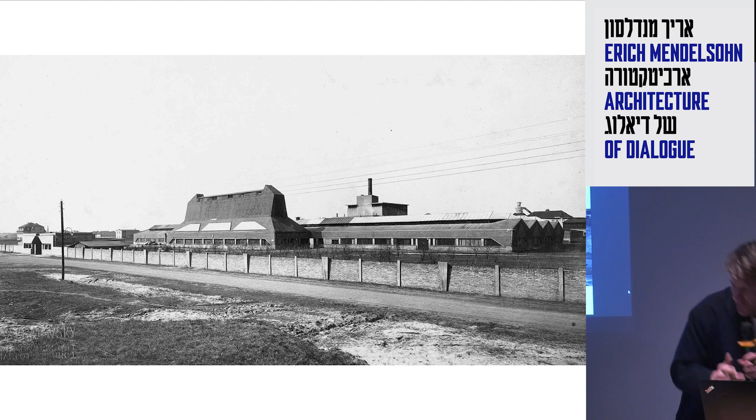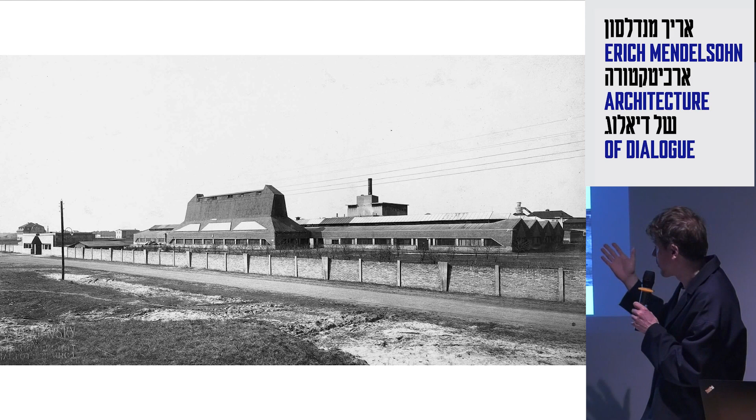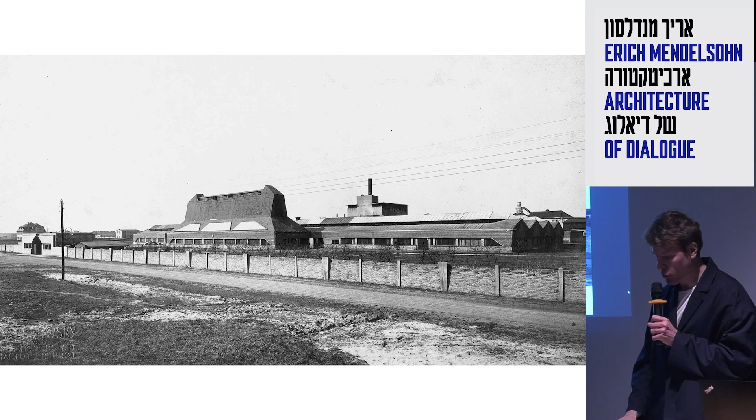Okay, so one of modern architecture's most dramatic roofs had a short lifespan. Daring in its outline, the roof of Erich Mendelsohn's famous dye works at Luckenwalde, a photo many of you will know, was erected in 1921 and torn down in 1935 after the hat factory was taken over by a machine building company largely controlled by the German Air Force and under the direction of Göring. This is a historic photo. Transforming what was once a hat factory into a war plant also resulted in the removal of its most prominent element, the trapezoidal roof, which would have been too easy a target for future air raids.

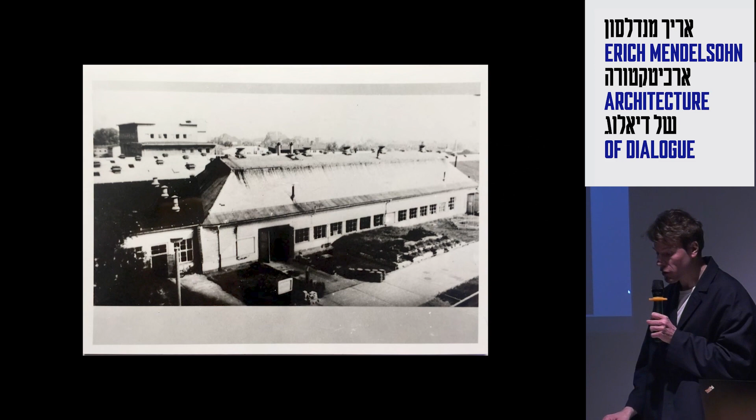Just 2 years later, in 1937, Mendelsohn heaped his projects into a mound, an ink drawing of which exists at the Kunstbibliothek in Berlin. In fact, his buildings in aggregate amounted to an entire mountain village of considerable size, crowned by the famous Einstein Tower. Whether this structure simply lent itself to becoming the crown, or whether Mendelsohn sought to give it a particular significance, still in 1925, it might have been Luckenwalde at the very top of a similar drawing. You can actually spot it center left.

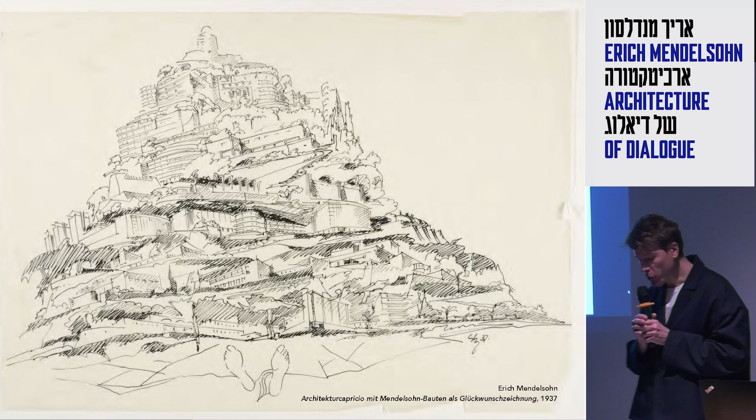That year, that is in 1925, Hans Poelzig and his students visited Mendelsohn's office in Berlin, and when he was asked about his best building to date by one of the students, Mendelsohn replied without hesitation, Luckenwalde. I assume most of you know the structure inside out, so I will offer just a bit of context. In a way, Luckenwalde is synonymous with the hat factory Steinberg, Herrmann and Co., which stands as a classical modernist masterpiece in a small town some 40 miles south of Berlin. I realize everything is in American because I work on a manuscript, so it's not in the metric system, but that is not so important.

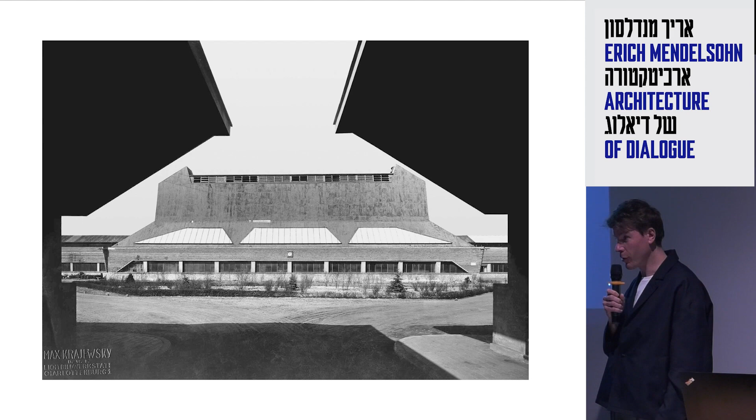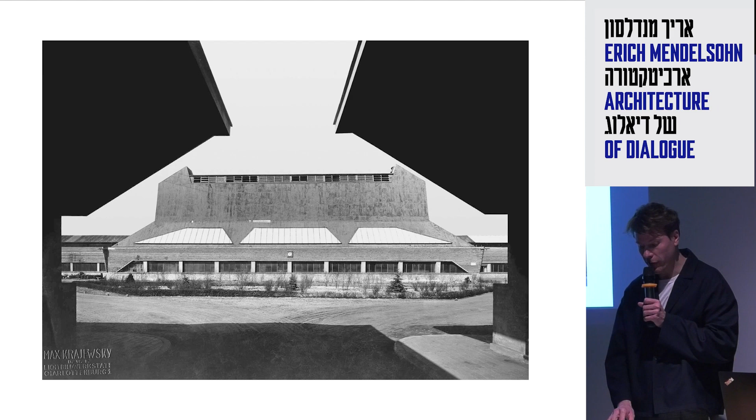Luckenwalde had long become the cradle of German hat fashion. The town witnessed an increase in textile and metal factories from the mid-19th century onwards, and in 1871 the first company adapted its production from textiles to hats. For long, the German hat producer Friedrich Steinberg vied with Gustav Herrmann, one of Mendelsohn's early patrons, for the best hat designs, but after merging their companies, they commissioned Mendelsohn to devise a new manufacturing plant on an empty lot on the outskirts of town. It became one of the paradigmatic expressions for an industry of the future, with critics like Adolf Behne pointing out the functional layout and its compelling translation into a tight spatial form.

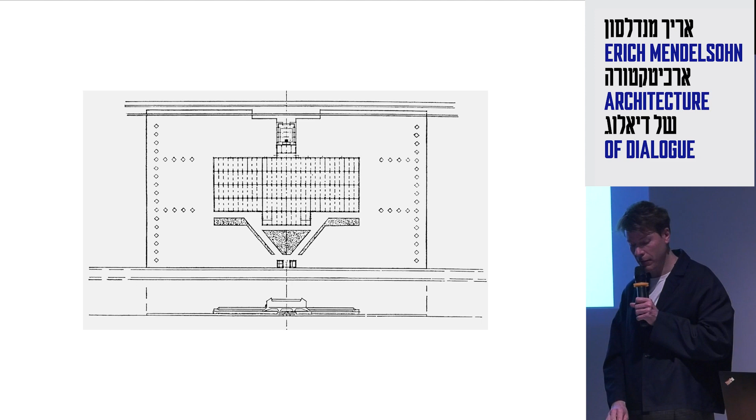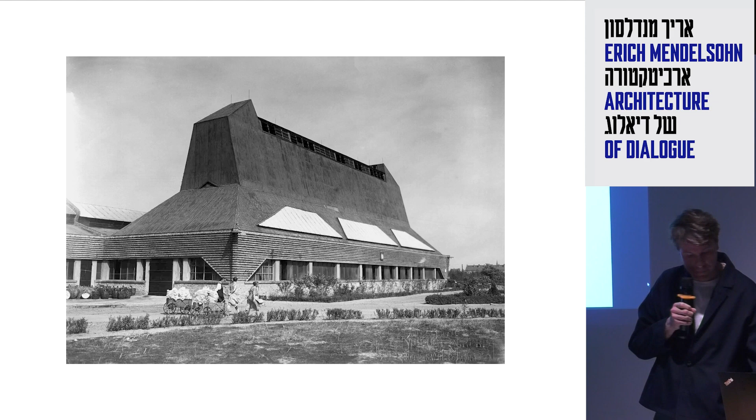At the center, which you see here on the site plan, 4 manufacturing sheds are framed by the dye works in the south and a power station, which we just saw also in Achim's presentation. And at the bottom, right next to the street, you can also see the small gatehouse. The factory's dye house, with its shaft-like hood, recreated the outline of a hat, while at the same time funneling through the roof the toxic fumes accruing inside. It was this feature in particular that ultimately led to a follow-up in Leningrad, the so-called Krasnoye Znamya, or Red Banner Factory. There is actually in Carsten's recent Birkhäuser publication also a cross-section, which I hadn't seen before.

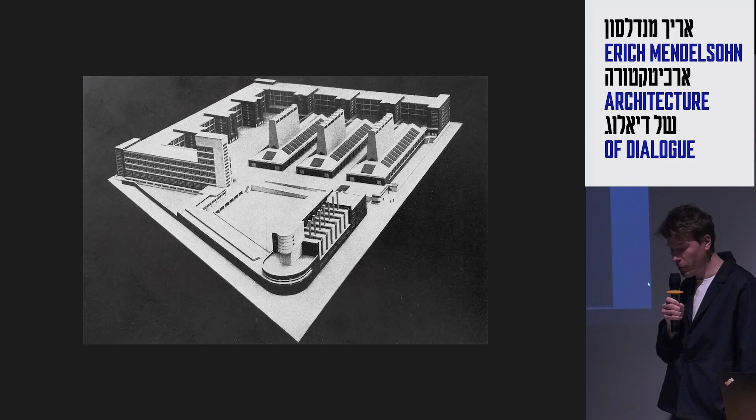In the summer of 1925, following Mendelsohn's visit to the Engadin, where he spent some time with Louise, he received a phone call from the Russian trade mission declaring their interest in the hat factory. 2 days later, on a warm Sunday in August, Mendelsohn made a day trip to Luckenwalde to prepare for a first meeting. He went swimming in the morning and lost his glasses, which could only be retrieved from the lake's grounds through prolonged dives by his friends. Finally commissioned in October that same year, in 1925, Erich traveled to Moscow and Leningrad together with Louise, where both went to visit all the monuments. This is all well documented in the correspondence. Louise found the stay in Leningrad particularly, and I quote, exhilarating, and for lunch she often relished caviar and vodka.

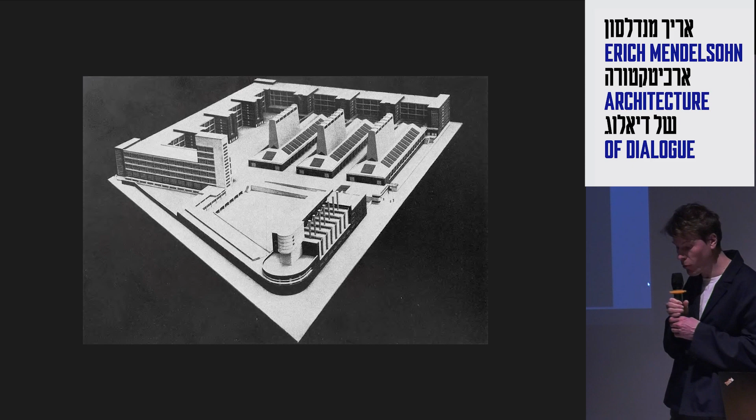Her memoirs recall the circumstances that led to the contract in Leningrad, a passage worth quoting at length. So this is Louise now speaking. Among the most fascinating people who came to his office were a group of Russians. Their purpose was to receive information about the dye works, which were part of the Luckenwalde hat factory built in 1921. When Erich received the commission to build the hat factory, he carefully studied the manufacturing process and became appalled by the working conditions of the laborers.

The steam of the dye vats permeated the whole shed, in spite of large exhaust fans, which only caused a strong draft and afflicted a large number of workmen with pneumonia. Erich found an excellent solution to this problem, which became widely published in industrial magazines and must have come to the attention of the Russians, who planned to build a large textile factory.

The principle on which Erich solved the problem of achieving a dry white shed was a very simple one. He constructed a chimney-like hood over the dye vats and upper arches into which the steam was exhausted. This created a chimney over the whole length of the building and effected constant and uniform air exchange. Erich led the Russians through the entire factory, and they were sufficiently impressed to offer him the commission to build a textile factory with 3 dye vats close to Leningrad.

Planning a large complex of building for Russia, a rather enigmatic country and unknown to most Europeans, excited not only Erich but the whole office. A day was set for bringing the plans to Leningrad, and the work in the office extended into the midnight hour. Bach records were played, inexhaustible quantities of coffee were provided, the atmosphere was pregnant with creation. We left for Leningrad in the fall of 1925, 1 year after Lenin's death. The textile factory was going to be built outside of Leningrad and combined a power station, 3 dye works, an administration building, and the actual factory.

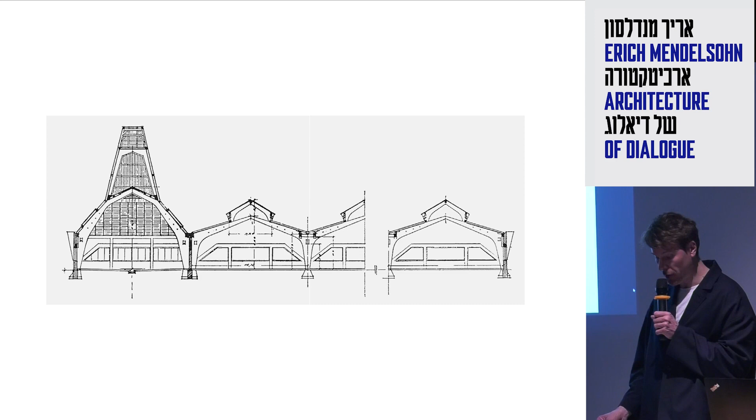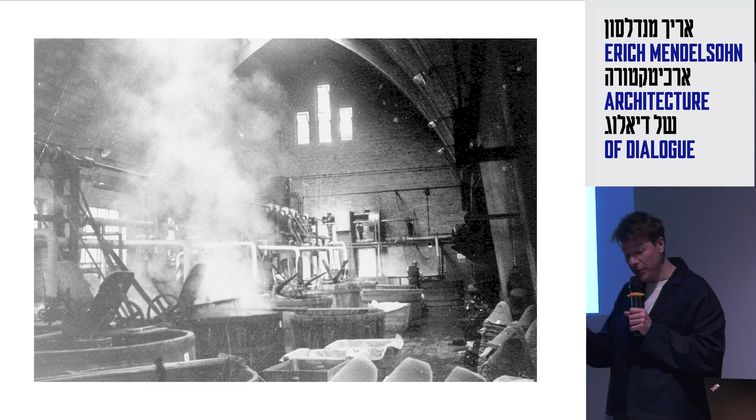So what was actually going on inside? The production of hats required workers to dye felt or wool, a process releasing poisonous fumes which in turn caused high humidity levels inside. And here I'm actually not sure, that is one of the photos I found in a compilation by Thomas Drachenberg. It doesn't look like the interior of Luckenwalde, so something is off. Okay, but you get the idea. The principle, I think, is still well illustrated. As a result, the warm, moist air affected the workers' lungs as well as the materials, and it also impeded interior visibility, which further complicated the work process.

Previously, architects employed smokestacks, fans, or pressurized air to attenuate the emergence of fog. But these measures created only new conditions, such as draft and an excessive temperature rise. Stacks alone were too exposed to the fluctuation of outside temperatures and simply furthered the condensation of steam. By contrast, fans were either too weak or produced too much turbulence inside. Mechanical ventilation was of little help. Apparently, Mendelsohn was the first architect to come up with a solution, relieving the nuisance of poisonous fumes without creating side effects, often more harmful than the waste steam one sought to get rid of in the first place.

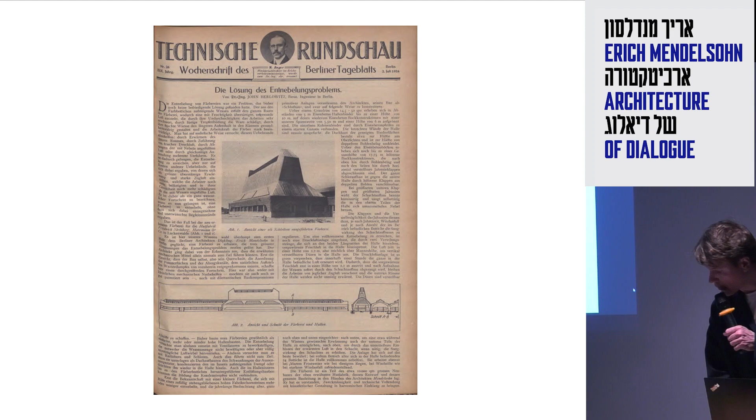How was this accomplished? One could facilitate the necessary air exchange by dint of negative air pressure, something Mendelsohn discovered by mere happenstance. According to John Berlowitz, a contemporary and Berlin-based engineer, Mendelsohn ran into a still operating dye factory whose, and here I quote, accidentally kept smokestack had the ability to defog the interior. Ultimately, a serendipitous discovery paired with architectural knowledge and years of research into primitive facilities enabled Mendelsohn to devise this structure. Berlowitz, the engineer, called it Schlotbau in German, in essence a chimney structure.

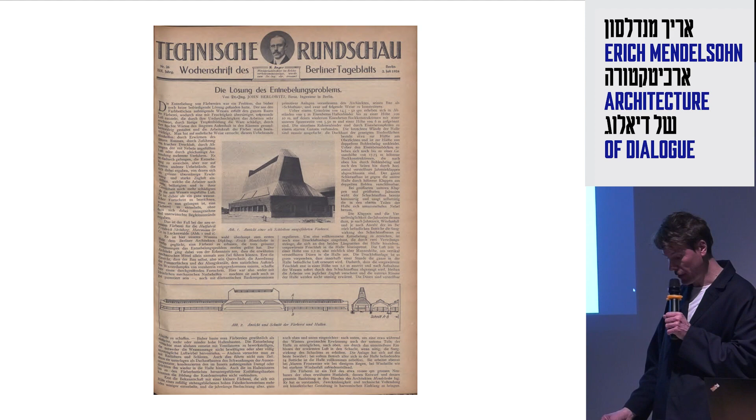Where previous designs brought about rising temperatures and draft, side effects which further exacerbated the condition of lungs already distressed by the toxic fumes, at Luckenwalde the interior was completely free of fog, even when the facility ran at full capacity with 24 dye tubs. For Berlowitz, it was the design itself, a response through architectural form, rather than building technologies, that really fixed the issue.

That's a translation I did, quoting from the newspaper. As far as we know, it was the Berlin-based architect who managed for the very first time to build a dye works that, despite its large dimensions, has completely resolved the problem of defogging. Only the insight that the building itself, that is its cross-section, the arrangement of windows and ventilation ducts, would have to enhance the natural buoyancy of the steam from the outset, was a major step forward.

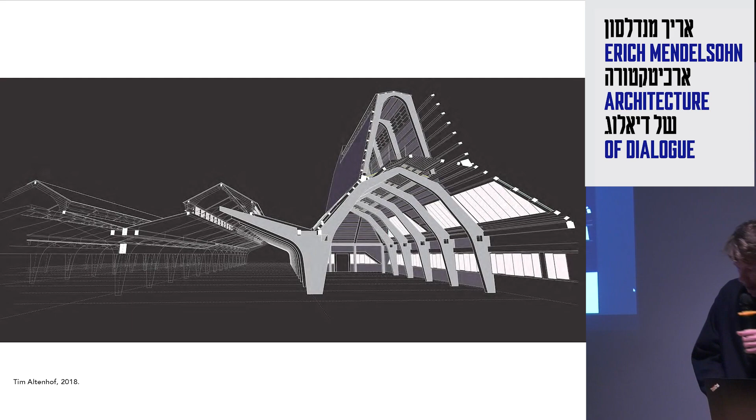At a height of 7 feet, just above the workers' heads, outlets for preheated compressed air enhanced the buoyancy force active inside the dye works so that air could be completely changed in just 1 hour. The account of Berlowitz is in line with that of Louise. Primitive or simple, the solution came in the form of a chimney. Most scholarship on Luckenwalde refers to the dye house as a kind of invention.

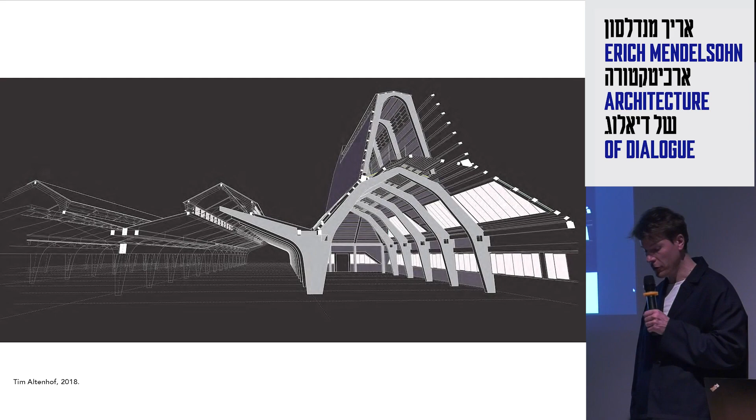In 1956, Arnold Whittick, and I have a slew of quotations now, describes it as an entirely new type which Mendelsohn invented. Sigrid Achenbach in 1987 notes a novel ventilation system. In 1997, Kathleen James Chakraborty sees in the dye works a significant technical innovation, and only 1 year later, Regina Stephan writes about an entirely new functional principle. Yet another year later, Bruno Zevi alludes to a special ventilation system that Mendelsohn invented.

While Kathleen James points to a few references for Luckenwalde, Josef Olbrich's gatehouse to a Darmstadt exhibition, a factory by Hans Poelzig, Bruno Zevi remarks that Mendelsohn's copious precedents were so diverse that they finally ended in smoke. It's just too many that it's pointless to actually point them out.

Published in 1992, a Bauwelt article suggests that Mendelsohn's design for the dye works was obviously influenced by Albert Kahn's industrial exhaust stacks, and that Kahn, the great industrial architect from the United States, was a frequent guest at the Rupenhorn estate. I'm not exactly sure what to make of this conjunction, not least because the Rupenhorn house was only built years later. Kahn is mentioned for the first time in 1942 in the correspondence between Erich and Louise.

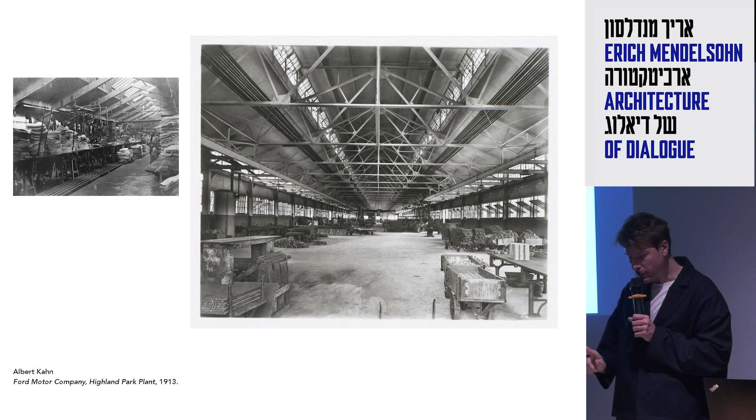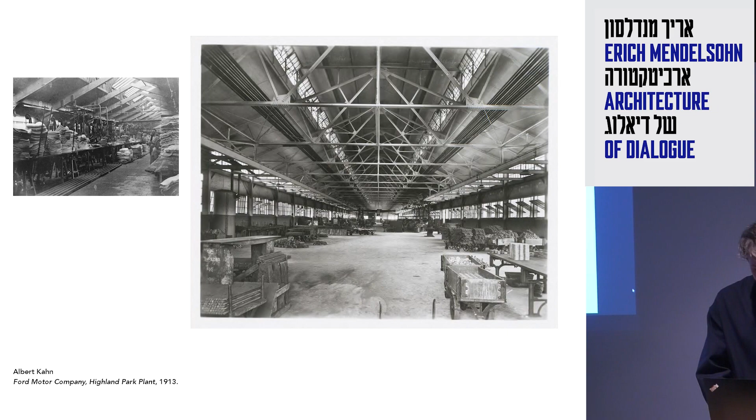I found this one photo, which could have perhaps been a precedent for the vents in the sheds, not in the dye works. But nor am I sure what to make of the invention posited by previous scholarship. Today I want to draw our attention to a cutaway section reminiscent of the dye works. Whether Mendelsohn knew this drawing is unknown to me.

It is included in Philibert de L'Orme's 1567 architectural treatise, Le Premier Tome de l'Architecture. As a French architect and writer, de L'Orme instructed the master builders of the French Renaissance both in the general layout of schemes as much as in the different ways of assembling them. In this manual, a woodcut shows an abstract kitchen, the walls of which are 10 to 12 feet high and perforated by apertures. Far above door height, the walls bend inwards, yielding a cross-section not unlike that of Luckenwalde.

Here, the two converging lines lead to something de L'Orme calls a lantern or chimney pipe. This lantern is 4 times narrower than the kitchen and open towards the surroundings by virtue of 3 narrow vents in each wall, quickly dissipating the smoke that develops below. A small circumferential wall running around these vents offers protection against the wind, while at the same time facilitating an upflow of smoke. A small cupola at the very top follows the same principle. Here, a double-layered shell is perforated in order to release the smoke. Was this the blueprint for Luckenwalde?

Rendered in brick, its outline and general proportion make it something of an unconscious archetype for what I call the house as chimney. A related discourse arose alongside chimneys, fireplaces and furnaces throughout the long 19th century, when all kinds of social and health reformers, educators and engineers, as well as experimental hygienists and physiologists promoted ideas on ventilation. In today's paper, I cannot rehearse this discourse, but briefly want to dwell on the house as chimney.

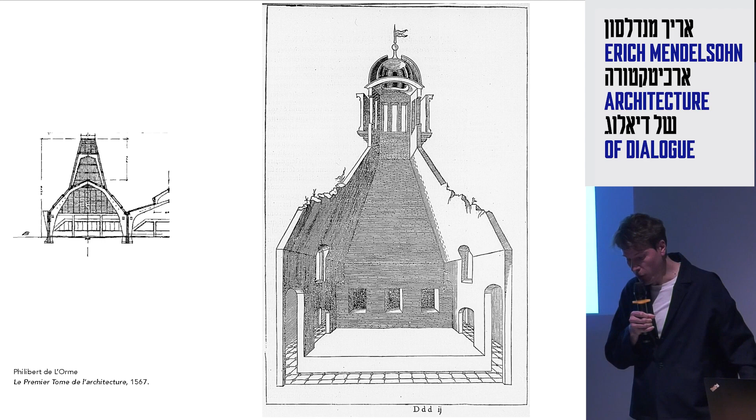Interior spaces of the 19th century were seen to be imbued with vitiated air, often acting as air traps. In his 1844 study on the English working class, Friedrich Engels condemned the overcrowded dwellings of the poor. So this is one of the first instances where someone makes an observation on the poor air quality inside. As though the vitiated atmosphere of the streets were not enough, they are penned, the workers, in dozens into single rooms, so that the air which they breathe at night is enough in itself to stifle them. Their houses are so built that the clammy air cannot escape.

Not only the polluted atmosphere posed a threat to urban dwellers. The dominant debates on the theory of ventilation were rather anthropocentric. Breathing human beings acted as the major polluter, vitiating the air inside through respiration and perspiration. This is why the American expert on ventilation, Lewis Leeds, wrote in 1896, and here I quote, that man's own breath is his greatest enemy. Here, ventilation was not imperative because humans inhale air, but rather because they exhale it. A remedy for these toxic interiors was what I call the leaky house. It promised relief by facilitating constant atmospheric exchange.

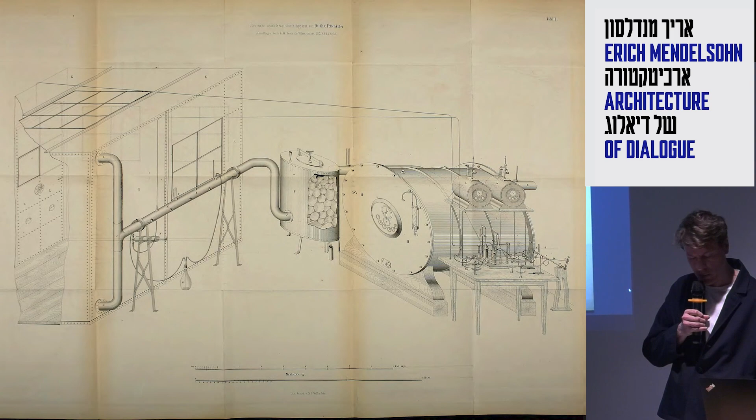The leaky house is simply the opposite of the closed worlds we know of today, buildings that seal us off from the environment, primarily on account of energy efficiency. In 1863, the German chemist Max von Pettenkofer introduced a wacky contraption to the readership of a Bavarian journal, which he called Respirationsapparat, respiration apparatus, a scientific device to establish a standard for air change rates necessary to keep a human being or animal in good health or alive.

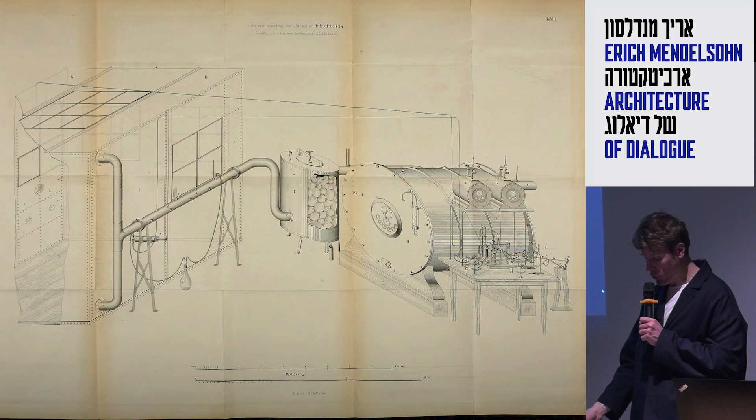Made of sheet iron and glass, it measured 8 feet on both sides and was sealed with wax. Almost airtight, the cell featured crevices and apertures, 3 circular holes which you can see at the door. And it was because of them that Pettenkofer found this respiration space to be able to communicate freely with the atmosphere. Frei mit der Atmosphäre kommunizieren. Soon, he ascribed this property to the house in general.

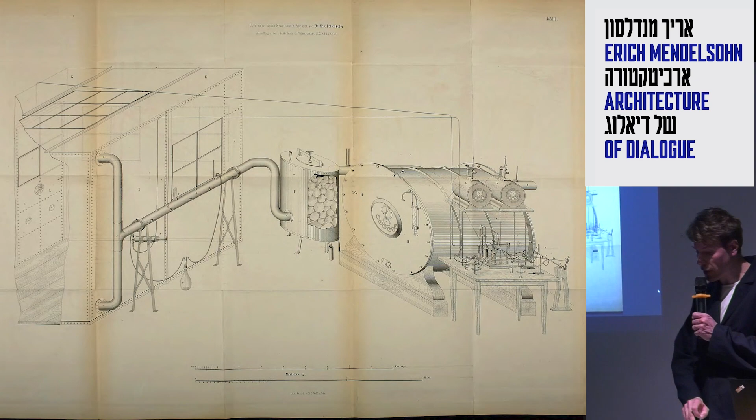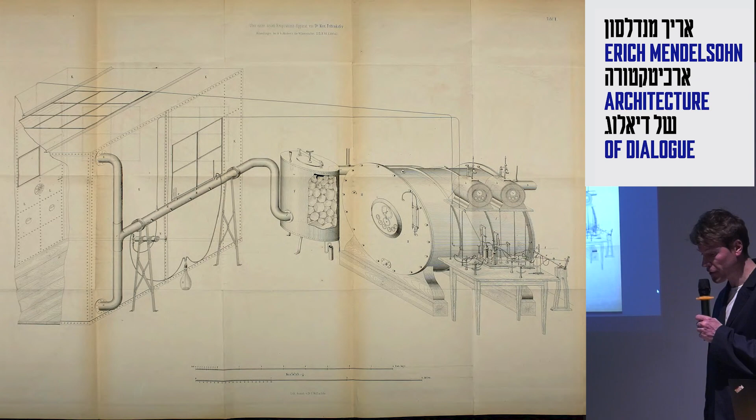In a series of lectures published in 1872, Pettenkofer claimed that no more than our clothing ought the house to be a contrivance for excluding us from the outside air. Human bodies need a steady flow of surrounding air, and tightly enclosed homes prevent a connection with the atmosphere. As mechanical ventilation was still uncommon for dwellings, the stack effect was a common theme. And because of temperature differences occurring between inside and outside, Pettenkofer claimed that leaky houses, in very broad terms, just act like large chimneys, because wind is always occurring, there are always temperature differences, has to do with physics.

If natural ventilation was good, resulting drafts were bad. The flow of air should remain imperceptible, because Pettenkofer and contemporaries in allied fields considered drafts unhealthy. Draft disturbs the body temperature merely on one side and poses a danger to health. Pettenkofer was not alone with these observations, and the Hungarian physician Josef Fodor, for instance, soon promoted similar ideas.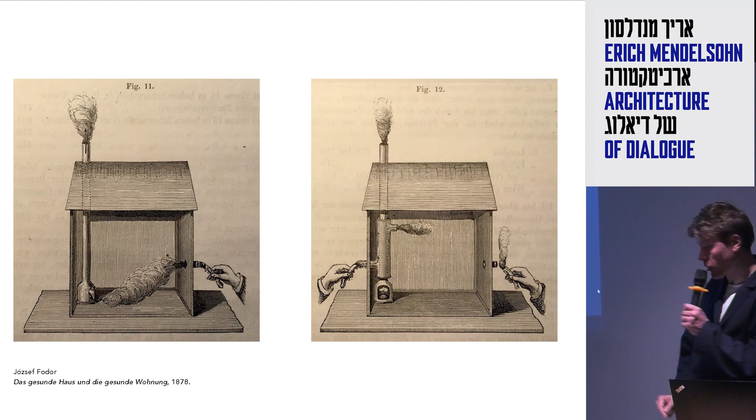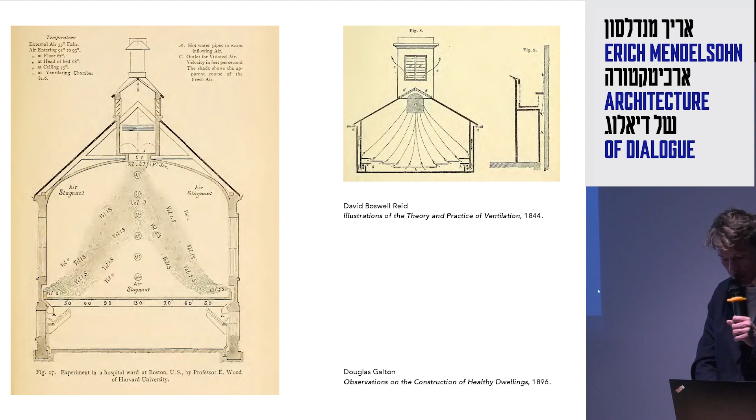Here are some cross-sections, for instance. This is all what I consider the house as chimney. There are different variations, but you also see from different countries. It's not just a discourse that is related to Germany, it also appears in the United Kingdom, in the United States, and there are many of these drawings emerging from the mid-19th century onwards. Here is another one actually by Wood.

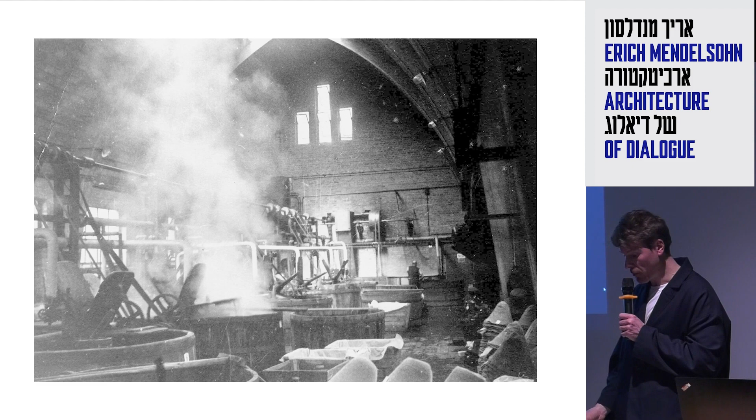So to be sure, at Luckenwalde it wasn't the workers who rendered the air impure, but the dye vats that produced toxic fumes. And still the structure in many ways was the architectural reification of this 19th century discourse on ventilation. It implemented most of its central tenets. The dye works produced a draft-free environment. The interior communicated with the outside atmosphere. The house functioned as a chimney, and it protected workers from contracting pneumonia, that inflammatory condition of the lung affecting the small air sacs known as alveoli.

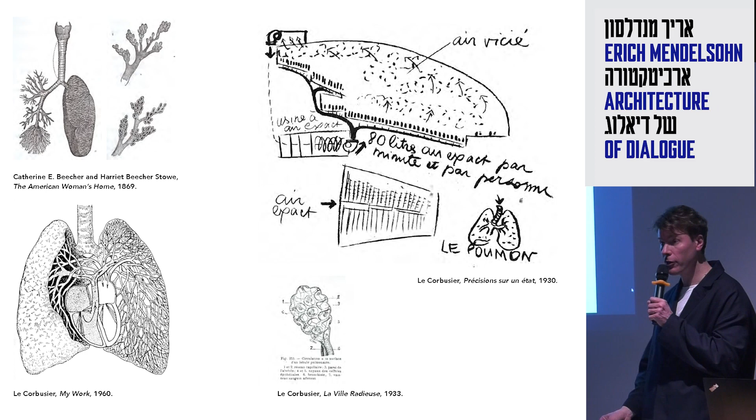If there is one organ to be associated with modern architecture, it is perhaps the human lung, not least because of tuberculosis, one of the deadliest diseases around the turn of the 20th century and in fact still today. Lungs often appeared in publications across the board, cultural, scientific, but also architectural. There are, for instance, drawings of lungs and pulmonary alveoli in the American Woman's Home by the Beecher sisters, as well as in many publications by Le Corbusier. Here you see a sketch, Le Poumon. There is another spread here from 1933. Otto Neurath made illustrations of lungs, and so did Fritz Kahn in his infographics popular in Weimar Germany.

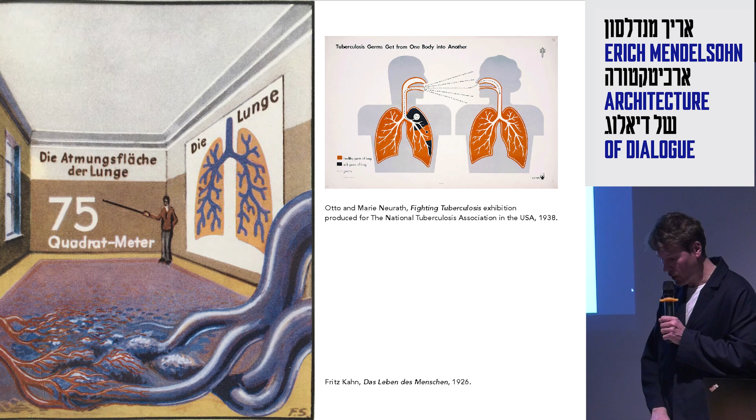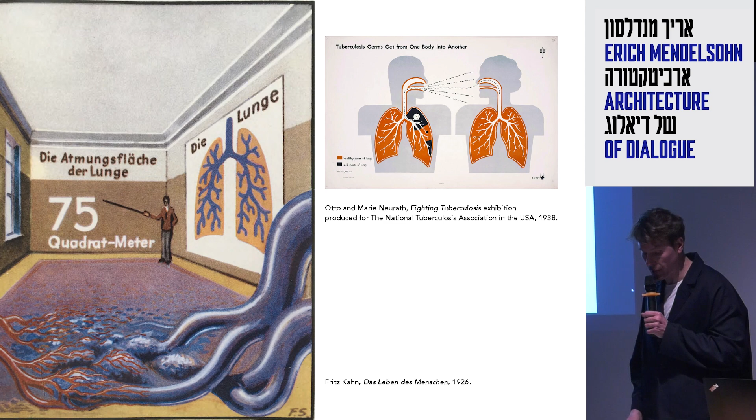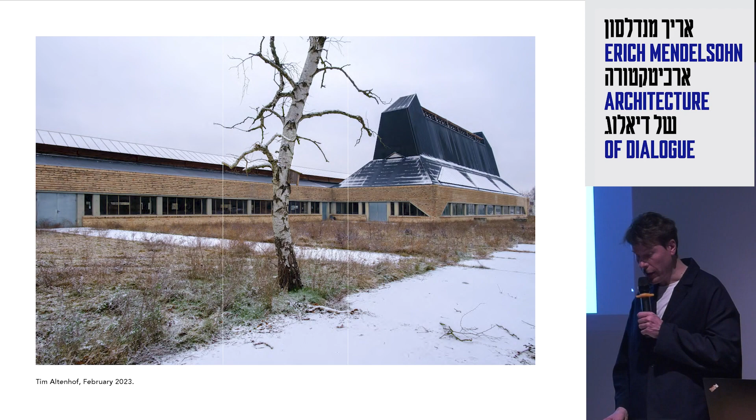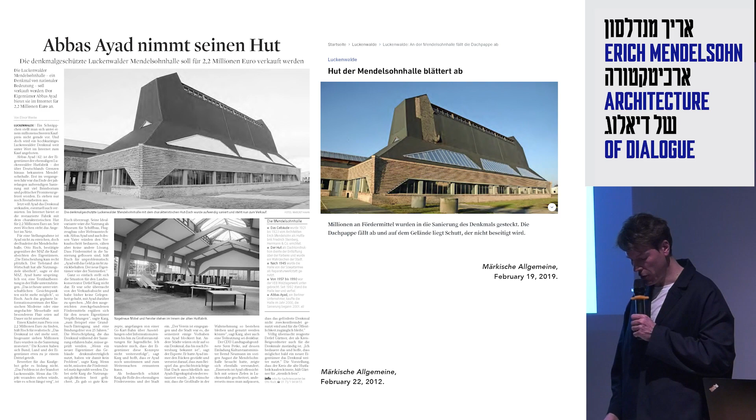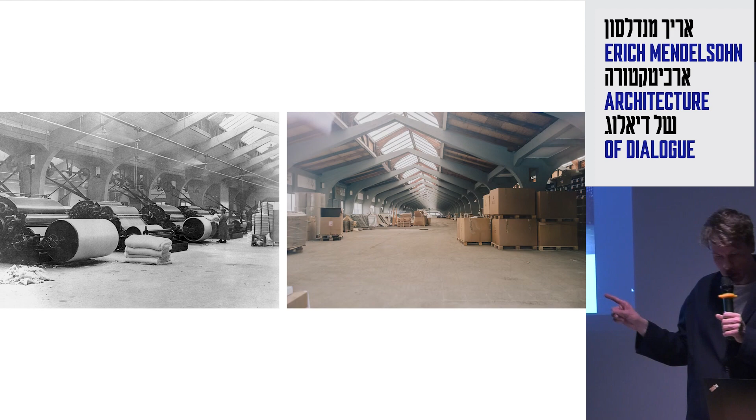These days, a nearby metal processing company rents the former production sheds as a storage unit for materials, which you can see on the right-hand side. It's a photograph from February. Inside the former dye works, artificial flowers in glowing orange and pale pink arise from wooden boxes, perhaps a symbol of resilience. They also increase one's sensation of an abandoned interior.

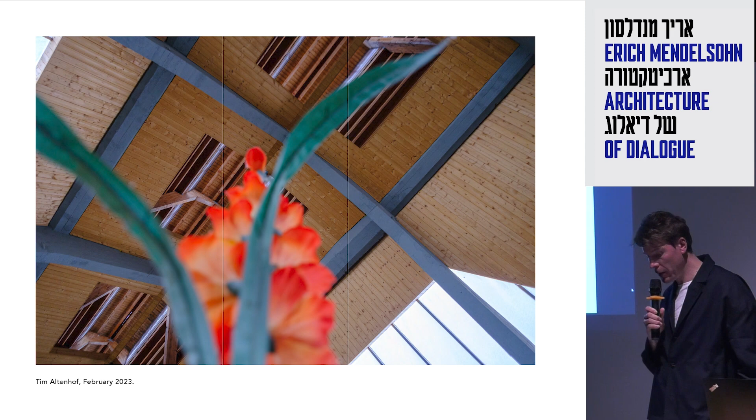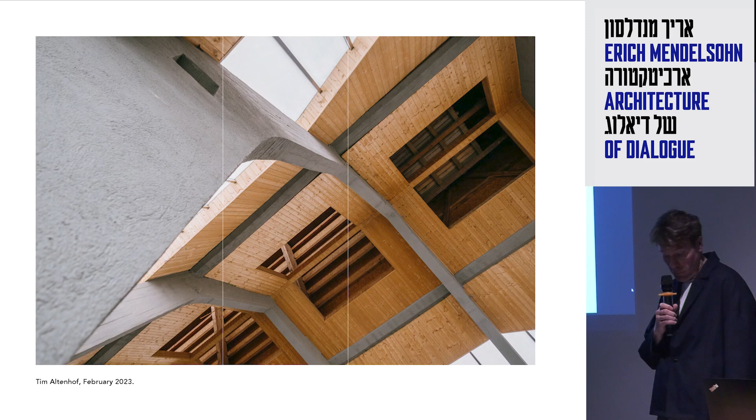For me, Luckenwalde is such a powerful structure because it is deeply rooted in architectural history, consciously or not. But it is such a modern structure at the same time because it reflected a much broader sensitivity to issues of breathing and to the vulnerability of lungs. The architectural solution was simple, perhaps even primitive. It was a chimney. Yet the rationale behind the structure was highly contemporary. Whether it was an invention, I would love to discuss with you.